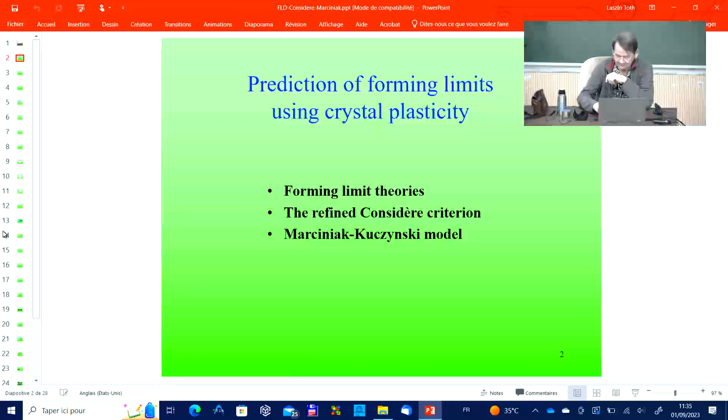So today we are going to look into forming limit theories, especially the refined Considère criterion, the Marciniak-Kuczynski model, and the perturbation theory. All this instability analysis started with Considère, who developed that very simple equation for tensile testing. That's called the Considère criterion. That was a long time ago.

And then for sheet metal forming, it's more important because many applications are in sheet form. Already Hill developed the theory for the negative part of the forming limit diagram, the FLD, a long time ago. And then Marciniak and Kuczynski, these Polish researchers, developed a theory in which an initial defect is assumed, in which finally the deformation is localizing, and then the formability is limited.

And much later on, a perturbation theory appeared in 1991, approximately 1990, by two of my colleagues in Metz, and when I joined the laboratory, I generalized it for the polycrystal case. Also, the Marciniak-Kuczynski theory I developed for the first time in a polycrystal application.

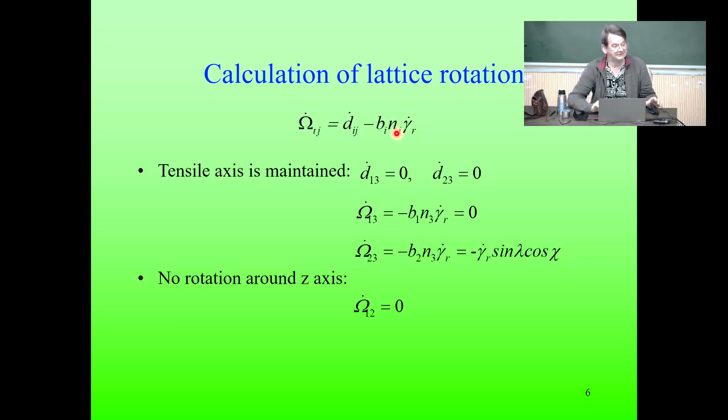Now, in the next slide, there's a change in the Taylor factor. Suppose I am starting with the ideal orientation for a given deformation. If the orientation is not changing, the Taylor factor will also not change. Exactly. So for a stable orientation, the m value will be constant, so dm/dgamma_r will be 0. And if we go back to here, this is 0, and we only have 1 over m. And this is what defines the stability of a stable orientation. Precisely. But here, what you look at is single slip.

There are a number of experiments you can do, for example, with a zinc single crystal. If you make it and begin to pull, it deforms to very large strain in single slip, not small strain, strains of 2 or even more. But what I couldn't understand is, if I have a stable end orientation, then it is giving the highest instability parameter. Yes, because this is negative here, 1 minus. So dm/dgamma is 0, it's higher instability. This is the instability parameter. If this is high, you need more intrinsic hardening to have stability. The higher its value, the more unstable your deformation.

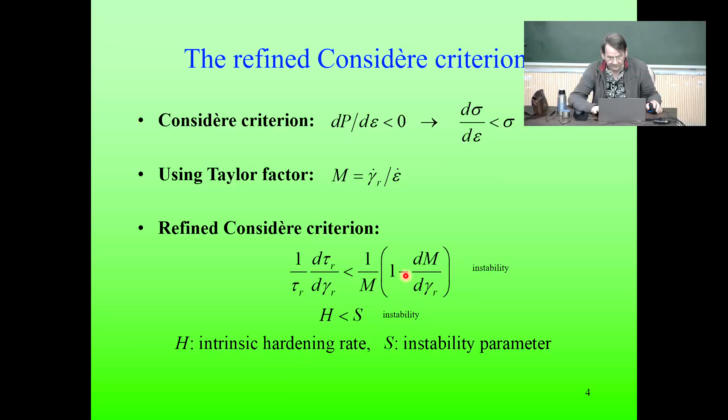And we will see what the simulation shows is happening because of orientation change in single slip and tensile testing, whether it is going to help the stability of the crystal or not. That's one of the results we are going to get now. Okay, so the simulation gives a formula for dm/dgamma_r. Actually, this is the formula. What we get is a very nice analytical formula, and the whole calculation can be done by hand. There is no need for a computer.

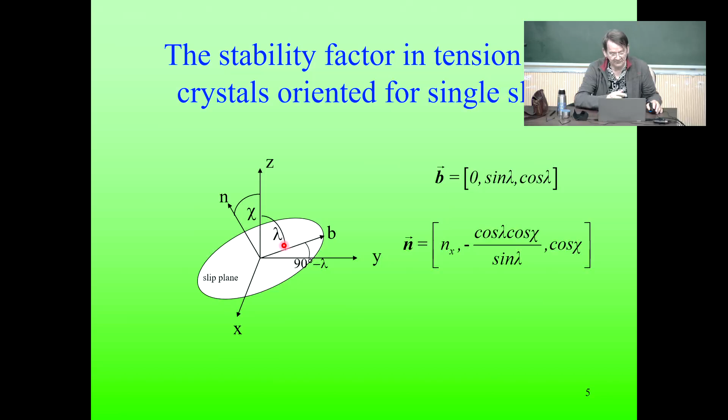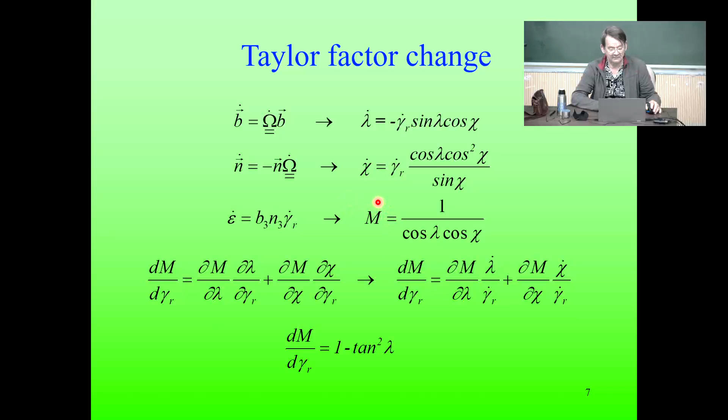So lambda is the orientation between B, the slip direction, and Z, the loading. Z is the loading in tensile testing. So simply the derivative of the Taylor factor is going to be 1 minus tangent squared lambda. And then having m analytically, having dm/dgamma_r analytically, we can trace and look at how it is changing. We can even calculate fully analytically the orientation of the crystal as a function of strain.

But one can also make a plot for different crystal systems. We looked at hexagonal; zinc is hexagonal, and in basal slip it deforms very nicely and easily, making a lot of deformation. So we plotted this instability parameter here in the inverse pole figure. You see its value in this part is nearly 0.01, but goes to very high values when the loading axis is coinciding with the slip direction. So here at this position.

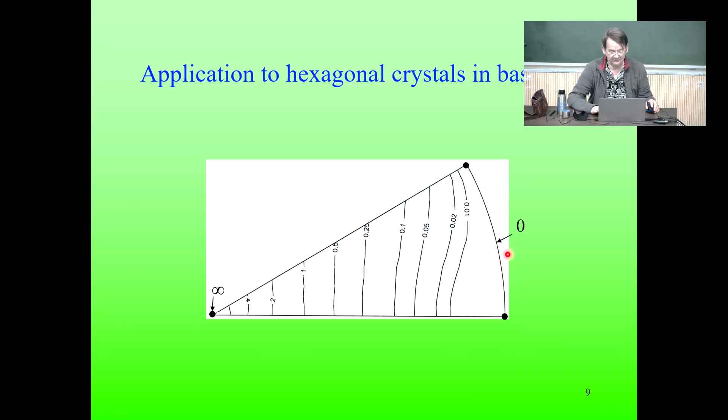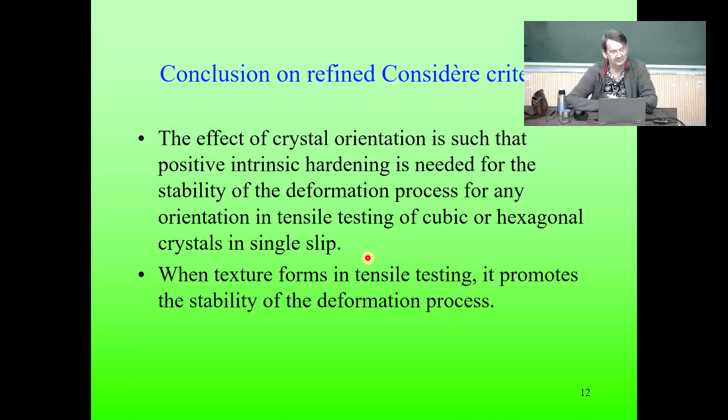Now, let's go into the sheet. In the sheet, the Marciniak-Kuczynski model assumes this groove in which the deformation can localize. And when it is localizing, deformation stops outside. So that's the limit. In the theory, it is assumed at a given angle, psi angle, with respect to your reference system. And this is a variable parameter in the theory. So you have to do the calculation for different initial angles of this groove, because the groove angle itself changes during deformation, except in the biaxial case, but otherwise its orientation is slightly changing during strain. You have to also consider that.

So this can be done for polycrystal plasticity also, but initially this modeling was done only for isotropic material. The only things which mattered were the orientation of the groove and the initial defect: the thickness in the groove with respect to the thickness of the sheet. A small value, almost 1, is assumed for the thickness ratio, like 0.90, 0.95, 0.96. A very small defect is sufficient so that deformation will localize into that band. So we have to follow the deformation in the two zones: zone A, which is the matrix in the big sheet, and zone B, which is the groove.

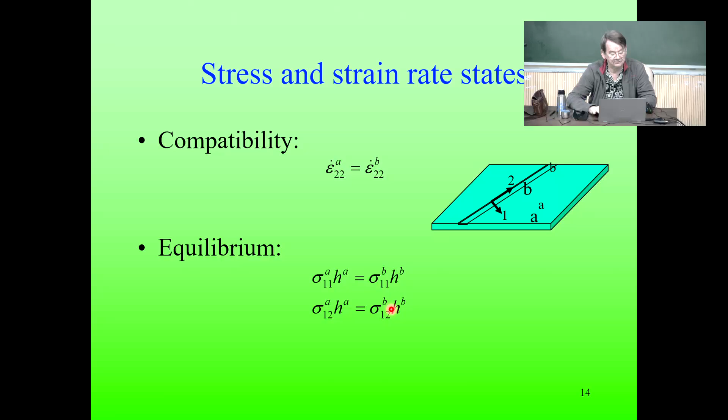We are in the groove reference system here, you see. This is also transmitting from one zone to the other, the force itself. So these are simple equations, but they have to be satisfied. We have three equations, one for the strain and two for the stresses.

We are in a plane stress state in sheet forming. So the stress components which are possibly non-zero are here, and the zero stress components are here. We have hydrostatic stress and also the deviatoric stress. The total of the deviatoric stress plus hydrostatic stress makes the true stress, sigma ij. And applying this equation on this component, one finds immediately that the hydrostatic stress value is equal to minus S33, where S is the deviatoric stress tensor.

So finally, this is the total stress tensor for plane stress state. Here the deviatoric stress is appearing, and in crystal plasticity, if you don't have elasticity, only plasticity, we only have the deviatoric stress. We don't have the sigma stress state immediately. But with this boundary condition, as you can see for sheet, we do have the hydrostatic stress value, how much it is, right here.

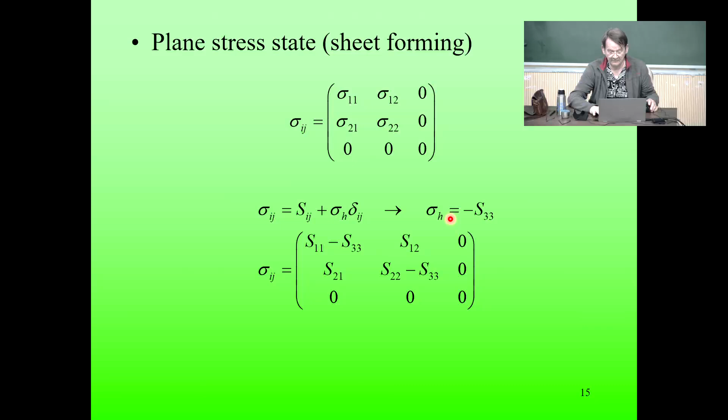Then hardening has to be included in the simulation. Here I'm reporting about a work which was done actually 30 years ago. This is when the first time we introduced polycrystal plasticity into the forming limit diagram. The principles are still the same. Here we were decoupling the hardening into two parts.

One was tau C, so that the increase of the deviatoric stress in the material is a multiplication of this tau C value and a constant stress value, which is related to the texture state of the material, and tau C is related to the hardening state of the material. So we somehow decouple them. For the intrinsic hardening, we use this extended Hollomon type equation here. Then we have an exponent and an m here, and tau C0 is the starting strength of the material.

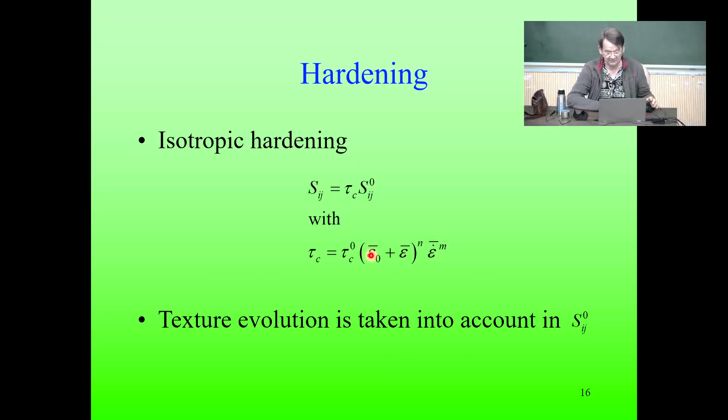Since then, with this hardening law, we can do better actually. What I presented on Monday, and we do the exercise on Tuesday, can be applied in a similar way, and then more general can be obtained. This was done at that time.

So these equations are to be solved. What is unknown is HB, how HB is going to change during the strain. We have an initial state for the thickness, and it's going to be decreasing. So the HB over HA ratio will be decreasing. This is how deformation is localizing. We have to find out what is the stress state in both regions, and then satisfying these equations, we will get how the thickness within the groove is reducing. So to get the stress states in the two zones, we use polycrystal plasticity.

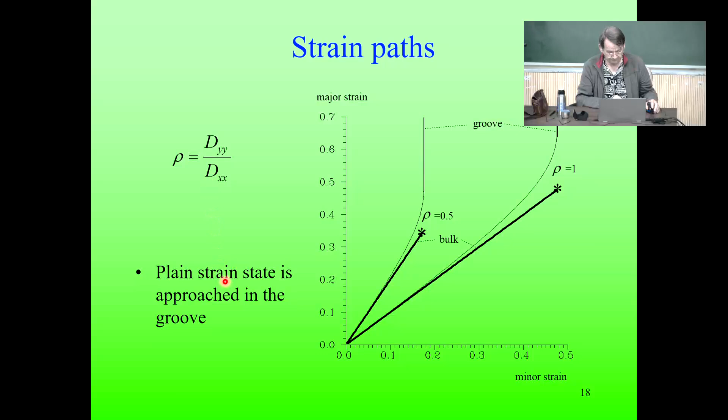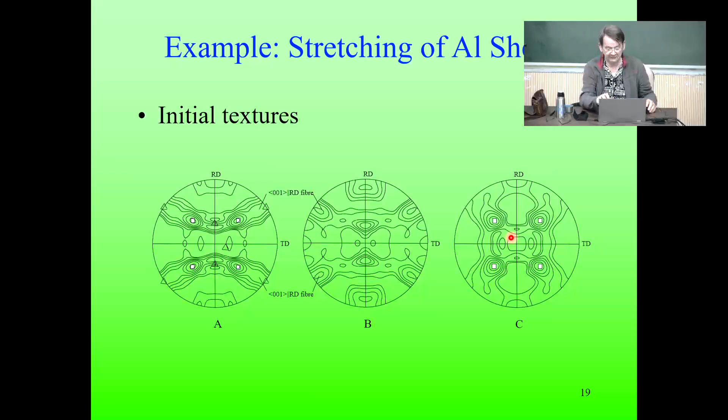Okay, so here's some results. Here aluminum sheets were deformed with 3 different initial textures. Here I show the textures. See, it's a kind of fiber and quite strong cube component is there. Here the cube component is weak in this texture, and here it's again like a 90-degree rotated version of this one.

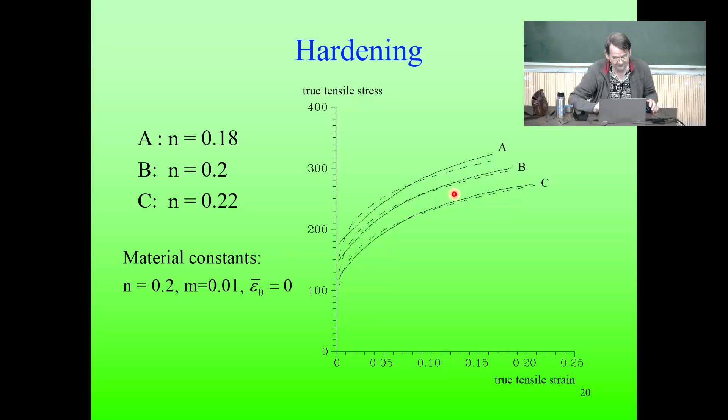Okay, and the hardening was simulated. As I said, at that time using this Hollomon type of equation, the simulation is not that perfect. Since then we are doing much better, but this was the fitting at that time.

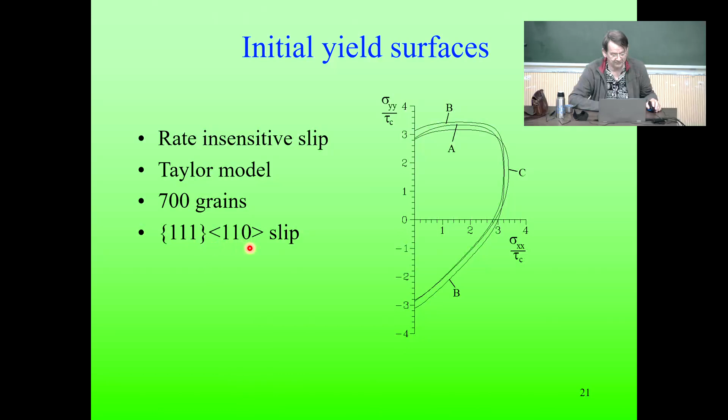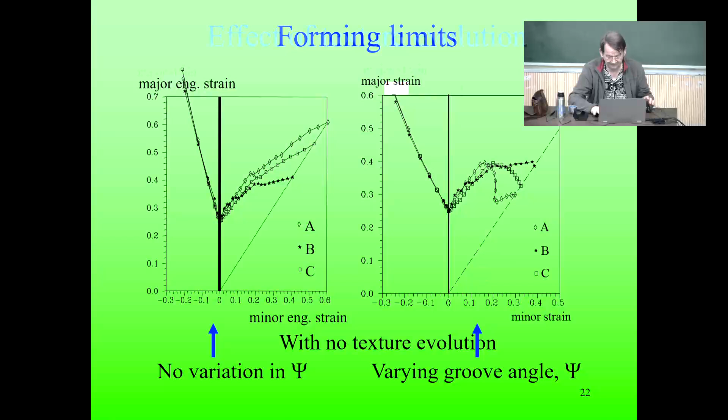We have to do both, so we have to update the texture evolution and also vary the groove angle. So here we are varying the groove angle. Without texture evolution, this is what we already showed, and with texture evolution, this is the predicted result. It seems the negative part is almost identical, texture independent. The positive part is almost the same, with some differences near biaxial only. So it's interesting that there is this uniform behavior, and only the biaxial part is texture affected and groove angle affected.

Yeah. There are some changes in the texture during this strain. Strains are not too high, because the value goes up to 0.4 here and 0.3 in the other. It's relatively not too big a strain in sheet metal forming. And then also for the negative part. Tensile testing is somewhere here, but it's actually a line here. It's not plotted, but more or less this line. Yes.

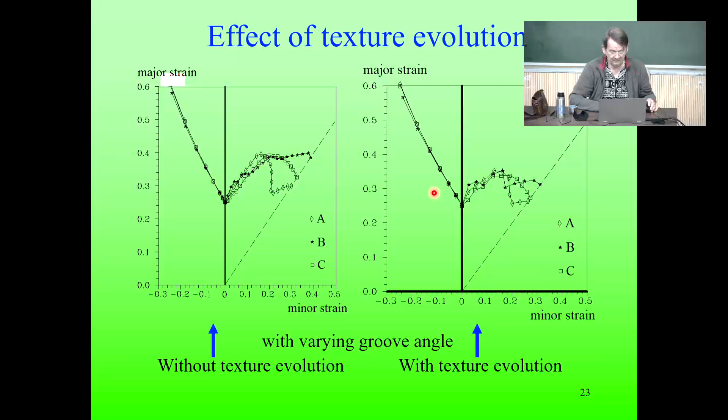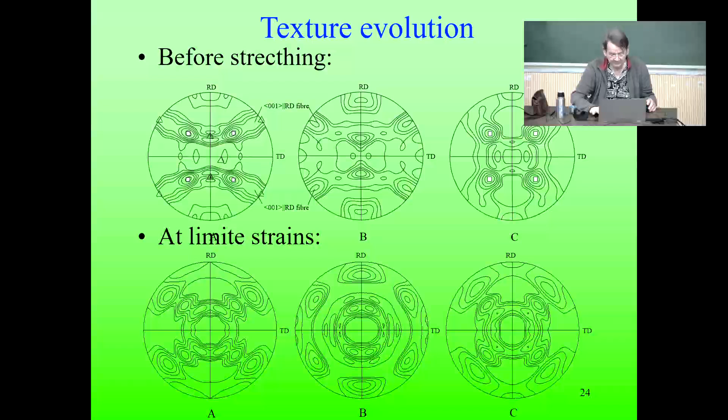Are you doing FLD measurements here? Yeah?

I was doing for titanium in Belgium, in Leuven. Very detailed forming limit measurements were done. Now, let me speak about this.

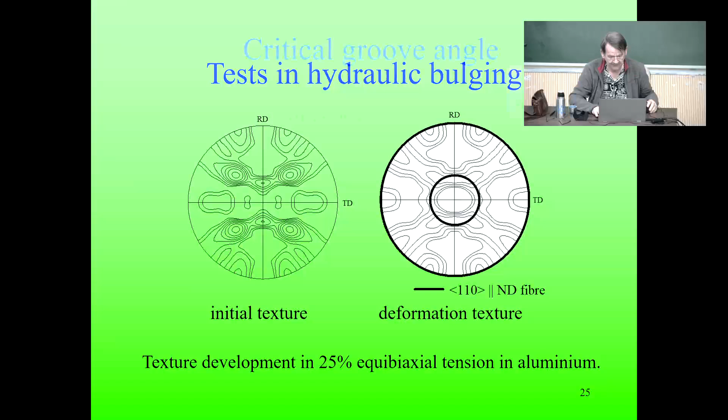This is really important, the texture effect, so the polycrystal effect on the critical groove angle in this theory. For the left part of the FLD, the critical groove angle is simply arctangent of square root of minus rho. This is the Hill solution here. He also suggested that for the positive part, it is 0. So the minimum strain you get when the groove angle is 0.

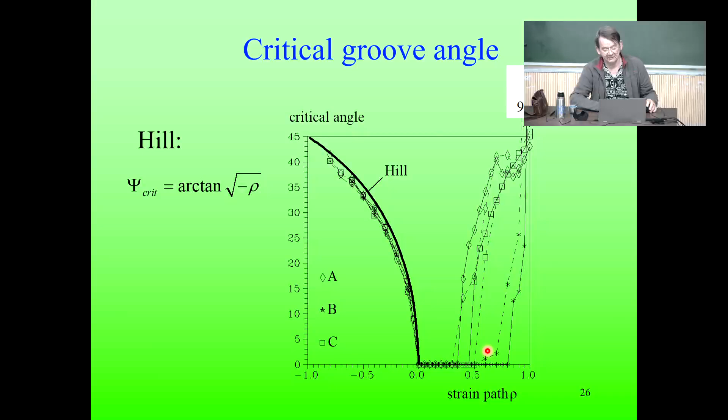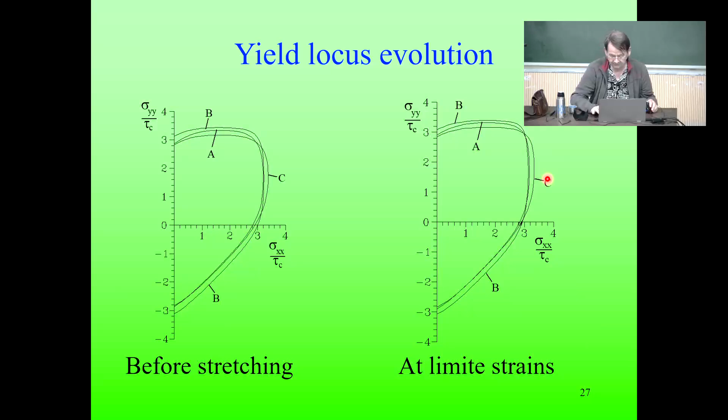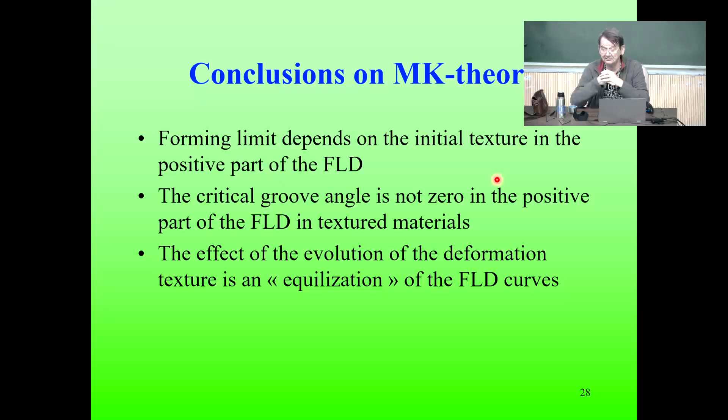So these are the conclusions on the Marciniak-Kuczynski theory: the forming limit depends on the initial texture in the positive part of the FLD; the negative is basically independent. The critical groove angle is not 0 in the positive part, opposing Hill's theory. And the effect of the evolution of the deformation texture is a kind of equalization of the FLD curves. So this was an old work, a long time ago.

But after, we had another history with the forming limits, because my colleagues were working on this, and they developed the so-called perturbation theory, that I liked a little bit better. So I'm going to continue with that one. This is more general, I believe, and different from the initial defect theory, because here the defect will be assumed not only for the thickness variation, but for all the parameters in the process. Much more general.

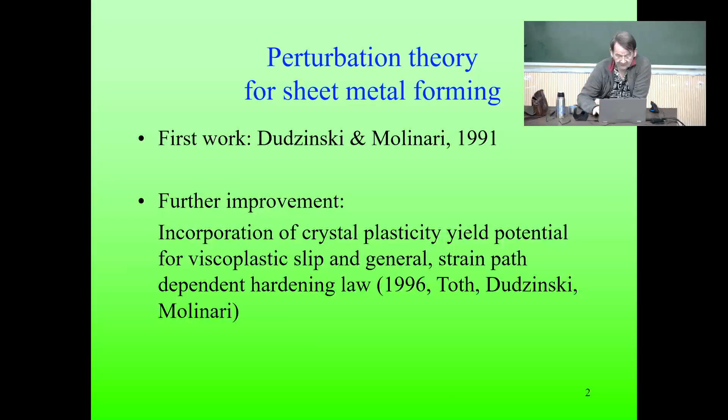So the first work, establishing the theory itself, was done by Dudzinski and Molinari in 1991. And then when I arrived at the lab, we developed in 1996 how it works with polycrystal plasticity and strain path dependent hardening, so in the most general case. Now, here the theory is quite substantial. Many more equations appear, a lot of mathematics. It's logical because we are going to do perturbation on the so-called homogeneous solution, and see what is happening.

Now we are doing polycrystal plasticity, and in polycrystal plasticity we have a good code. It can be a Taylor polycrystal code, it can be the VPSC code, which is capable of providing the whole stress tensor for a given strain rate that you impose. Then you update the strain, and you have the evolution of the stress state, and so on. This is the basic thing we need from the polycrystal: we impose a certain strain rate, and what is the response of the polycrystal.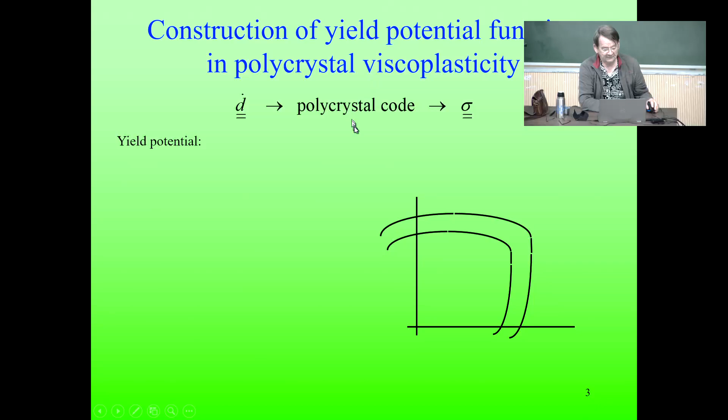Now, here we are in polycrystal viscoplasticity, and in viscoplasticity a unique yield surface does not exist. There is no critical yield surface in viscoplasticity, because at any level of stress there can be strain rate. So there is no critical stress below which there would be no strain rate. So viscoplasticity is a little bit different from the rate-independent behavior of materials.

This is complicating the situation, but we decided not to use the yield surface because it doesn't exist, and we defined so-called yield potentials, which replace the role of the yield surface. A yield potential is defined with the help of not only the stress but also the strain rate, because a yield surface in rate-independent plasticity is independent of D, the strain rate. You only have sigma, and you can make your plasticity criterion only with the stresses. No need for the strain rate.

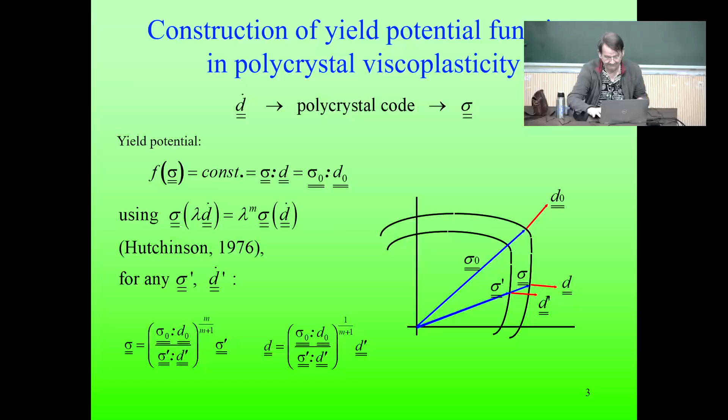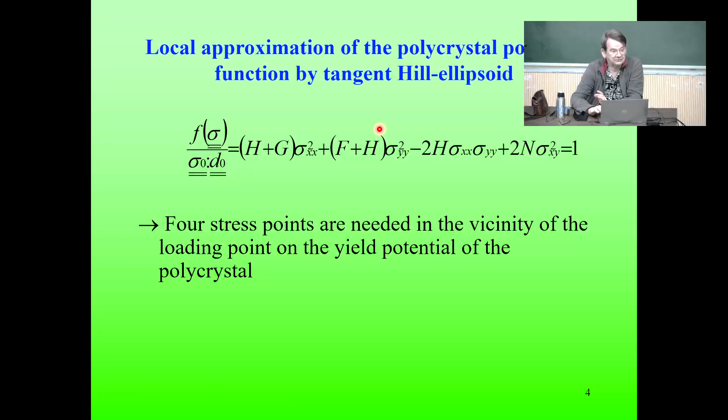We can use the normality rule, associated flow rule, to link the stress state to the strain rate state. So that provides us a lot of equations which permit us to solve the homogeneous solution problem when there is not yet instability. And then we are going to make a perturbation on that.

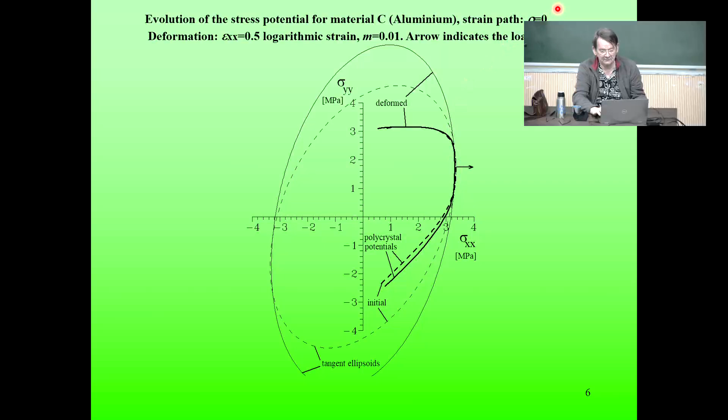And then there is a lot of change in the Hill ellipsoid. It is tangent before and after. The yield surface becomes more flat as we apply the strain in the rho equals 0 position.

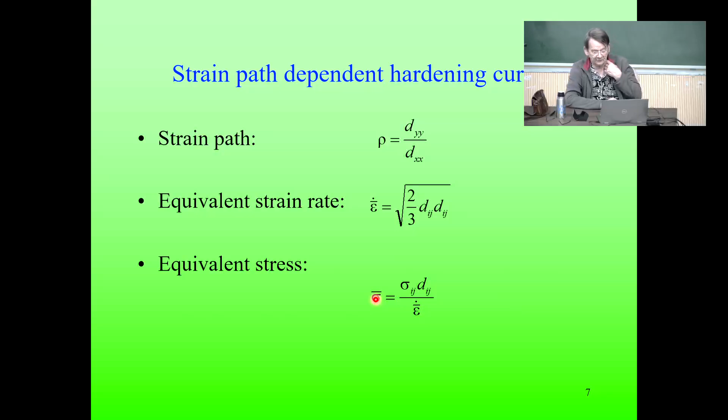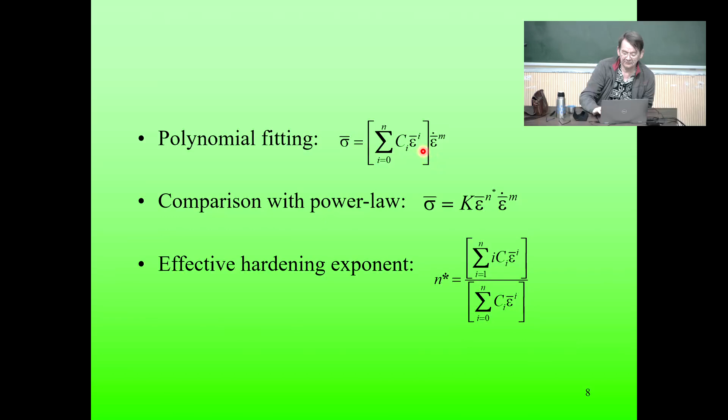But one can compare that if one considers using this formula, but with n variable here, and n is n star. If n star is varying using this formula, then you can actually use this formula for the perturbation, but you have to consider that n is variable. So this is how we actually did it at that time. This can be managed differently as one would like, but if it is changed, then the part of the perturbation theory equations which is related to the hardening has to be updated.

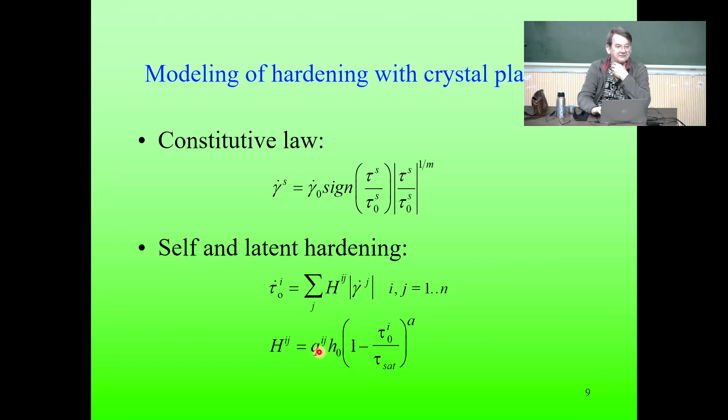And further, there are these self and latent hardening parameters, which are put into 4 categories. So basically, there are 4 parameters here. This is very sophisticated, and as we showed, very good agreement. If somebody is using this in polycrystal plasticity, surprisingly good agreements can be obtained with the macroscopic curves.

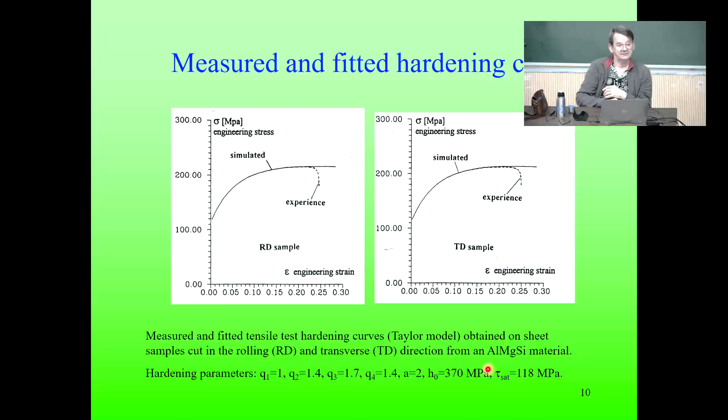You're not going to have one single curve for all deformation modes with equivalent stress and strain, of course, but they will be depending on the strain path. Here is the simulation, which shows minus 0.5 is the tensile testing, which was perfectly reproduced. And then if you plot it for the other strain modes, this is when rho is 1, equibiaxial stretching. And this is 0.5, between plane strain and equibiaxial. It depends on the strain path. It comes naturally from the simulation.

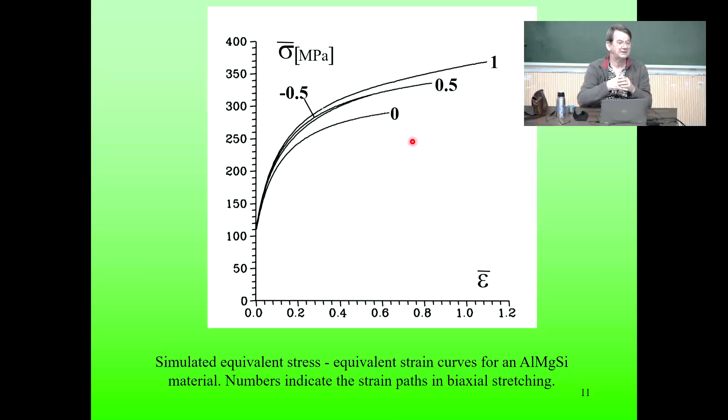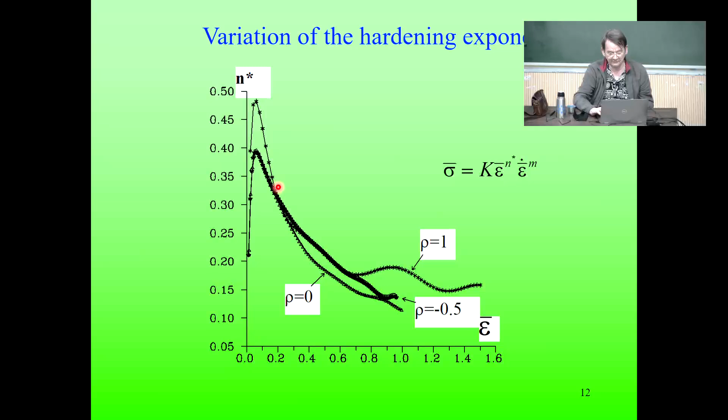And then, as I said, for simplicity, if we use this in the perturbation theory, then n star is going to be a variable with strain. This is just to show how it varies. Now let's go into the mechanics of the perturbation technique.